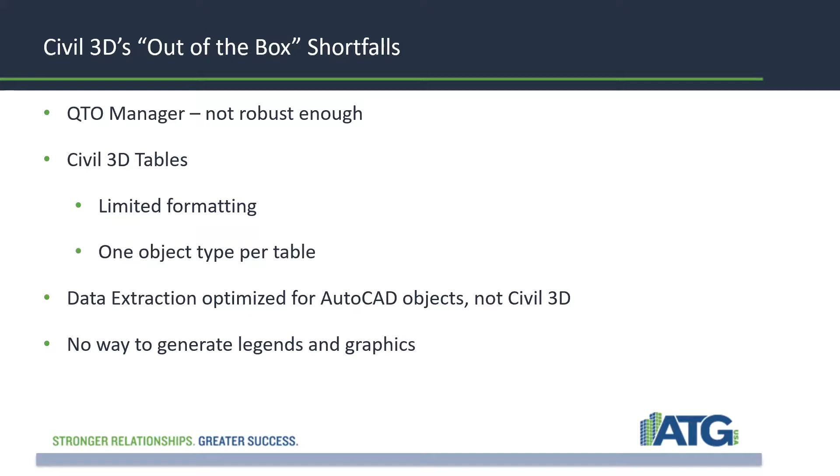There's also no way inside of native Civil 3D to generate those legends or those graphics based off of all those symbols. You still have to insert that block or draw one of those lines in order for it to show up. So that's where Data Wizard comes in.

We want to use Data Wizard because our legends that come out of this include only the objects found by our filters. So when we say, I only want to see fire hydrants, I don't want to see anything from stormwater, it's not going to show you any stormwater. And every time you have more fire hydrants or different types of whatever it is you're looking for added, it's going to be able to pick up on that for you.

You can do this at the level as narrow as an individual viewport or a whole layout. You can do it in one file and all of the XREFs that are inside that file, or you can do your entire project, and you can create one table or multiple tables at any of these different levels. Data Wizard works with both AutoCAD and Civil 3D objects.

Data Wizard has templates. This is going to allow your users to quickly reuse templates that may have already been set up for them or that they've set up before. Or if they need to make a slight modification, they can do that for their specific task without having to start over from scratch every time. And the big one here is there's no more standard legend that people have to work off of that needs to be organized or verified by hand.

So with that being said, I could tell you about all these things that the tool does and where the buttons work, or we could just hop inside the software. I think we all know which one we would prefer.

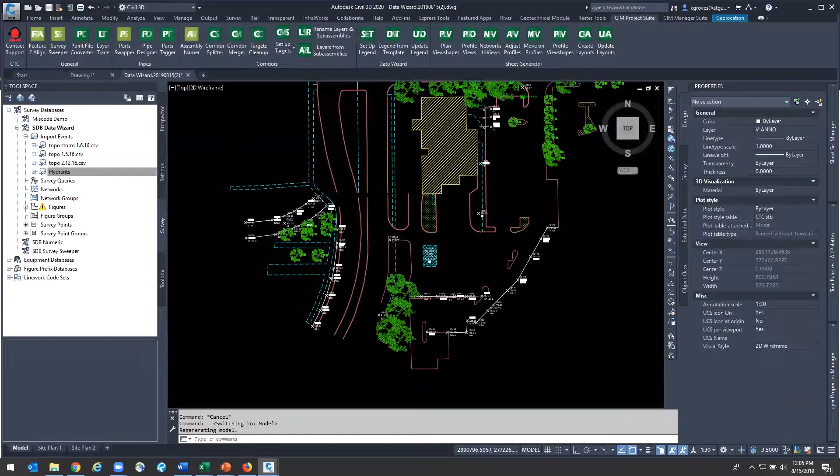So here we are inside Civil 3D. I've got my project. This was a survey specifically. We've got a client who has some property in this corner and over here on this lot.

So with that, I finally processed all of my line work. I've got all my codes looking right. Everything's all hatched up, and it's time to deliver this back off to the client and off to the civil engineer so that they can do their design.

What I'm going to do is come into the CIM Project Suite ribbon inside Civil 3D. I'm going to go find my Data Wizard panel, and I'm going to start setting my legend up. This is kind of the bread and butter here. If I had a template saved out, I could start from that. We'll go ahead and run through and create it.

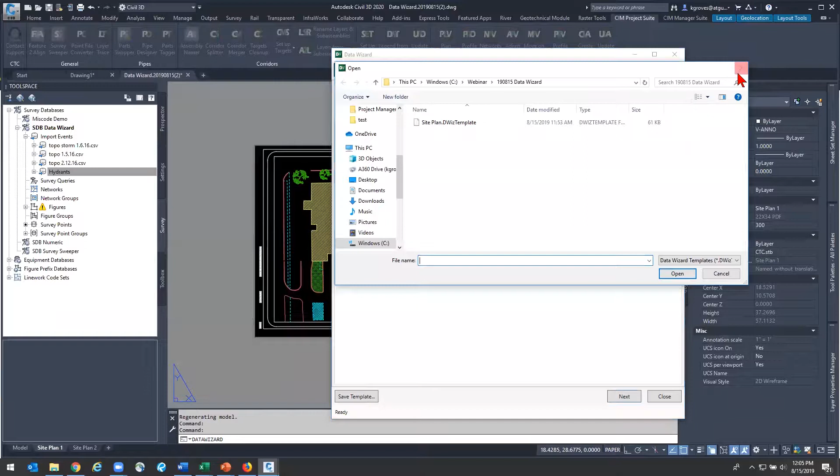But even through here in this drawing, we get to say, am I in one specific drawing? Is it the current drawing? And do I or don't I want to include the XREFs as part of that?

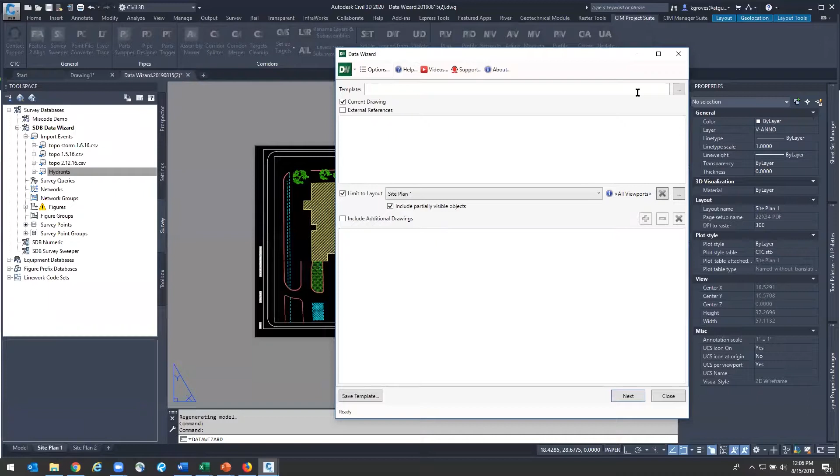For our layouts, I can limit it to a specific layout. In this case, I have Site Plan 1 and Site Plan 2. Right now, I'm interested in Site Plan 1. But not only just the layout of Site Plan 1, I don't want all the viewports. I just want this one specific one. So I'll remove the existing and then go link up to that.

If I wanted to do my entire project, this is where I could also say include additional drawings. Go find all of my different base files with my corridor and my pipe networks and my geometry, all my demo plans. Go ahead and bring me everything in.

And that's what this first page is. It's just about getting that high level information set up.

Next, the question is, what am I interested in? What types of objects do I want to pull out and use in my project in this read of my project? So I mentioned we've got AutoCAD and Civil 3D - that's 3D polys, regular polys, alignments, blocks, cogos, feature lines, survey points and survey figures, hatches, multi-leaders, parcel segments.

This tool is still earlier in its development cycle. There's a lot more that CTC wants to do with this, including getting pipe networks and corridors built into this. It's not there yet, but as I think we will all find at the end of my presentation today, that is not an excuse not to use Data Wizard. It still does a ton of work for us that we don't want to do all by ourselves.

So as I mentioned, this is a survey, so I'm going to be looking primarily at survey objects. But I don't know how many I've found, so that's why I need to hit the refresh button. And I can also see that my filter isn't set up because my filter matches my total on all three of these item types. So let's go ahead and see what it is we can do to cut back on that a little bit.

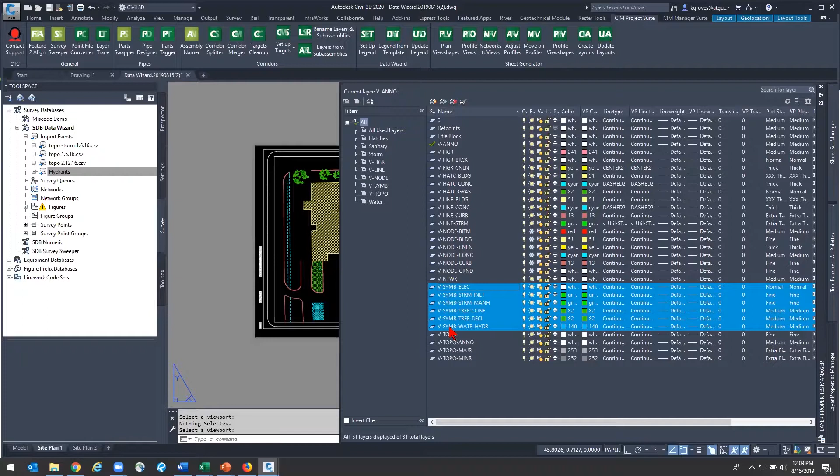So in this template, we've set it up in such a way that we've got our survey figures and our survey points split into two categories, plot and no plot. So all of our figures, all of our survey points that we want that are not going to plot, the description key set assigns them to a layer that has this node tag inside of it. All of the symbols or all of the survey points that we do want to plot have a layer with this SYMB or symbol plot associated with it.

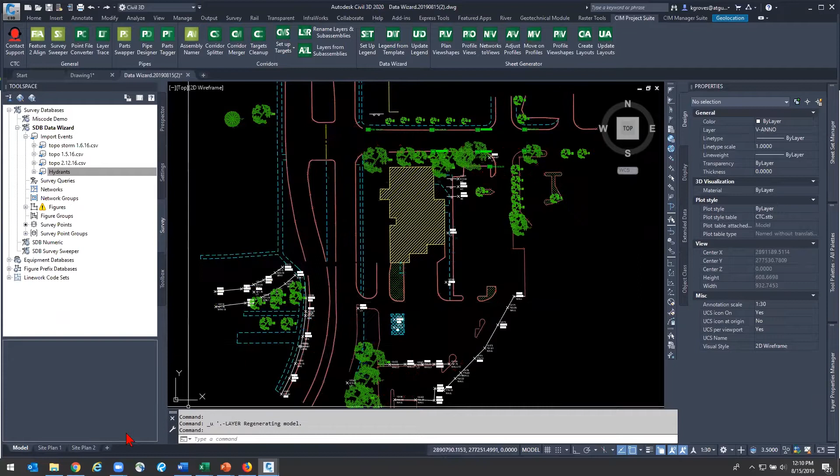If I pop into model space real quick and thaw out some of those layers, those node layers, we can see that's all the basic X stuff. Hey, I got a ground shot. Hey, I got a bituminous shot. Not generating line work, and there's no fancy block associated with it. But by setting our template up this way, it's going to make it really easy for me to use Data Wizard to find those objects.

So I'm going to go back into my legend. It remembers where I was at.

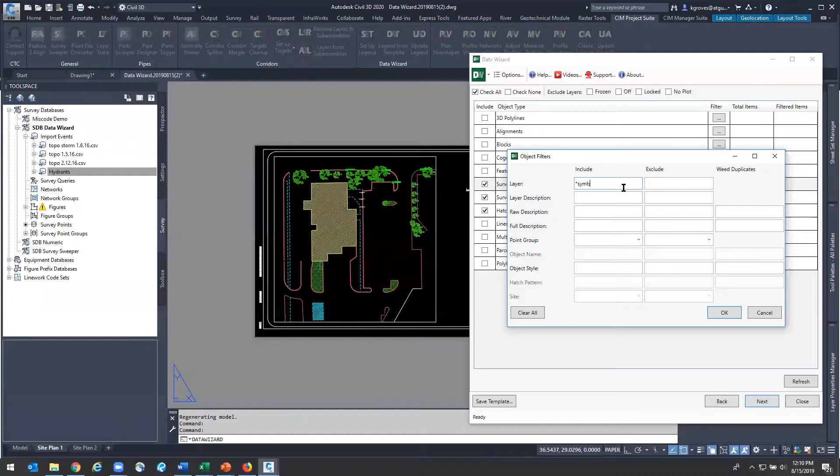I'm going to go in and I'm going to find my survey points, and I'm going to filter those to include the layer SYMB tag. Now it's filtered that down so that there are only 25 survey points that have fallen on any layer with that criteria.

For my survey figures, FIGR, that is the no plot layer, LINE is the plot layer, so I'm also going to include that, although not much is getting moved out from that. Hatches, not even going to bother because they're all there and they're what I'm looking for.

So also notice too that we have the opportunity on this "what are we looking for" page of the dialog where you get to say, am I interested in objects that are on frozen layers or no plot layers? Off or locked? Well, in this case, I'm doing my printing legend, so I would not be interested in objects that are frozen. I would not be interested in objects that aren't supposed to plot. That's not going to affect me right now, but I just want to point out some more of the flexibility that this tool allows.

So page 2 says, all right, we found 25 items, but what are those 25 items by the time we get to the third page? Well, I've got some trees, some signs, and a catch basin. But these trees are being duplicated. There is a way to fix that, and I'll show us how after a little bit. I want to get this table in first though. But we can also see our survey figures and our hatches. Buildings, concrete, curb, grass, all looks pretty great.

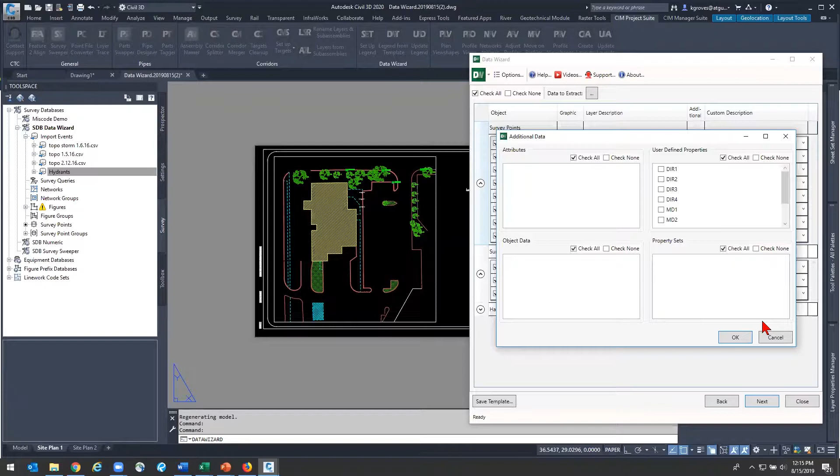Property sets, kind of the +1 to attributes, that can be assigned to most any AutoCAD or Civil 3D object. For example, this is a really common way to talk to Navisworks. So if you wanted to categorize your information that way, you could add a property set to it, and that's visible to most Autodesk products. So this additional data helps us find more about what exactly it is we're looking to pull out of these objects.

So I'm going to remove the additional data out of this table, but I'll leave that custom description in. And now we can move on. We've said, where am I looking? What am I looking for?

Specifically with those objects, what is the data that I'm interested in for those objects in general? And now in this last page, we get to say, how is this all going to get put together and how is this all going to get spit out? Well, we can rearrange the order of these things by clicking and dragging around them. I can bring my hatches up front, or maybe I want my points first,

whatever. So you can do that kind of manually down here, or you can run up to this data sorting button and you can sort your object groups. So you can sort those alphabetically or not. Within each different type, you can choose to sort its data differently. So you can sort it by the object or any of that stuff that we pulled out. So I'm going to sort these by custom description. We'll say OK.

Capitalization, pretty straightforward. Which letters do we want capitalized where? And then for the graphics, cell size. So now we're getting into how big we want all these tables, all these cells to be. And with that, we have the opportunity to say, all right, well, big cells, little cells, some as big as your head. The graphic scale factors, I'm going to leave this at 1.33 right now, but this is how we talk to the source data for this particular object.

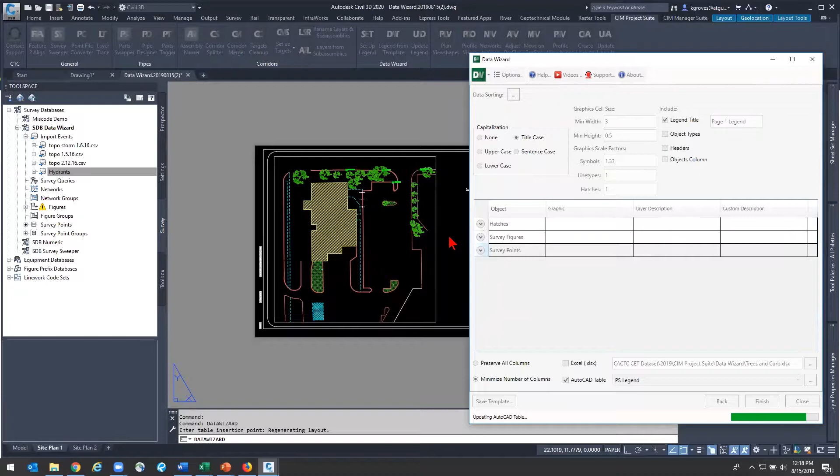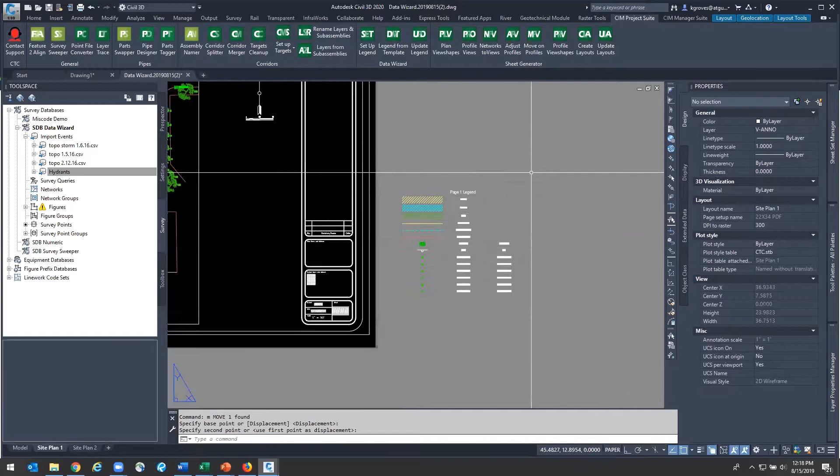And I can see that a lot of that stuff that I specified was in there. I put my hatches on top. It got sorted with my hatches on top. I wanted to include my custom description. It included my custom description. And I can see the ways in which it was different than my primary. But this isn't exactly the legend I was looking for a couple of reasons. My trees are being reported with not a whole lot of extra information, but for some reason I have extras.

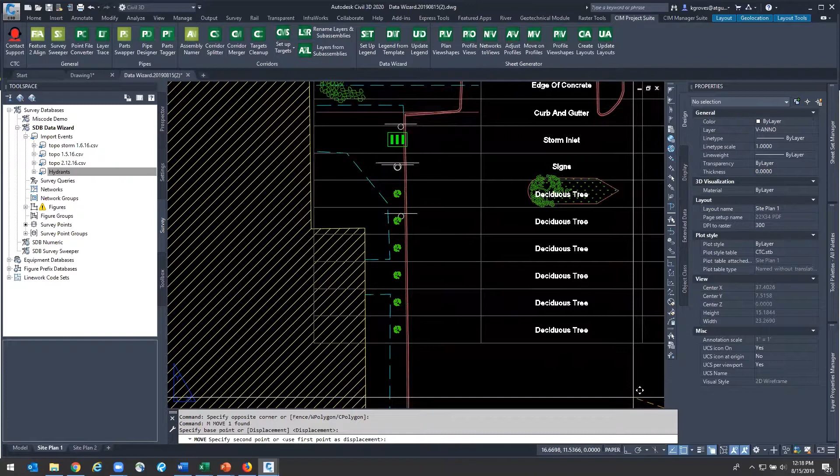And if I take this over to my model space and kind of hover over to check, I can see that my sign is a little bit bigger than what's being reported in plan view. And I can see that my catch basin is as well. Well, let's go back through and let's modify this table. The one thing that's going to be kind of different for users to understand is that with these tables, you're probably just better off deleting it than trying to go back through and update it, because the result's going to be the same anyway. And you have to set up your filters before you can apply them to your object.

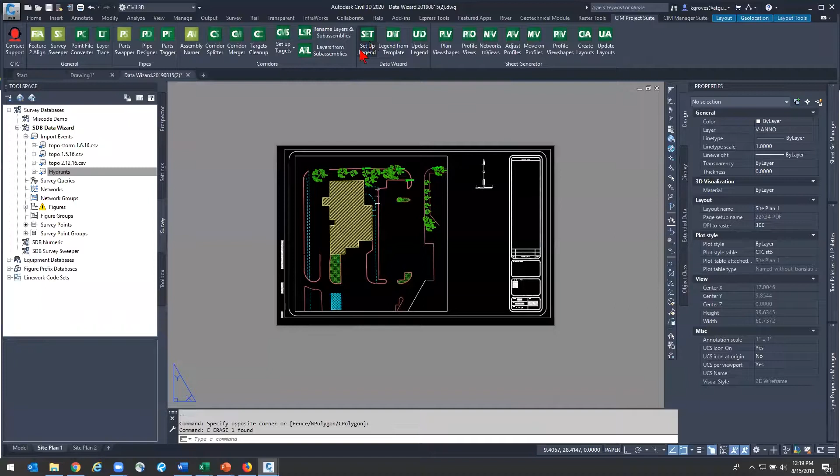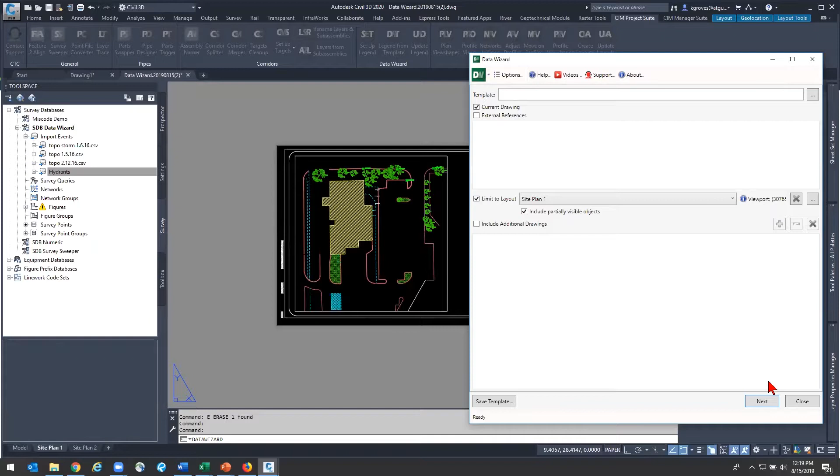So let's go back and set that legend up. Notice that everything is going to be remembered from when I was back in here last. That's because this tool, all the CTC tools, write some data to the program data user preferences folder. So that's how a lot of this is getting called back to. But I want to keep most of this stuff the same. I'm still interested in all of those different types of objects, except I don't want to grab every single survey point that meets the criteria of being on my symbol layer.

That's because I have multiple different trees with multiple different raw descriptions. That's why I'm getting those multi-reports. So this third column that I kind of skipped earlier for weeding duplicates, this is where I can come in and say, well, I don't want to duplicate my tree deciduous. I don't want to duplicate my catch basin, and I don't want to duplicate my sign. Standard code asterisk notation there.

Now when I run that, I've been filtered down to just 3 items, which are my trees, my sign, and my catch basin. At this point, I'm also going to pull that custom description column out because I've got this set up with my layer descriptions to report accurately.

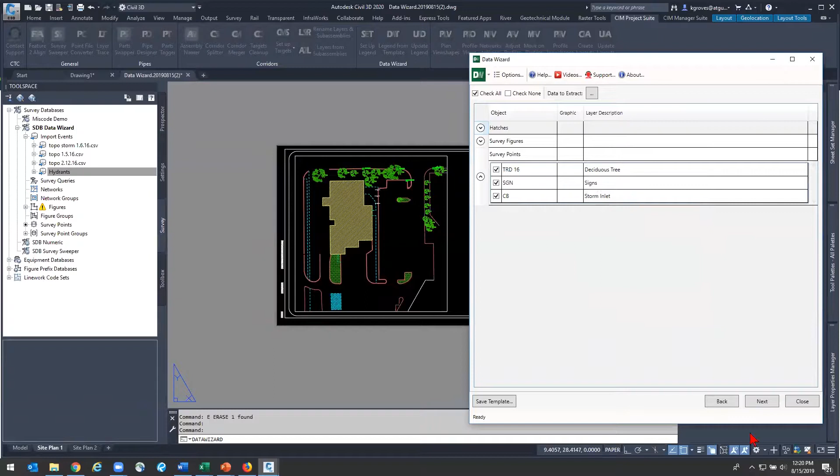And then I'm going to save this template for later use. Drop that table into my drawing. And now we can see that this is looking a lot cleaner.

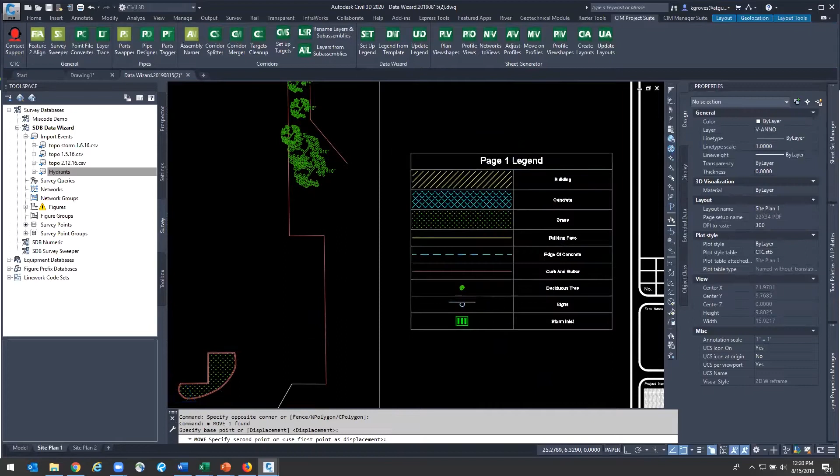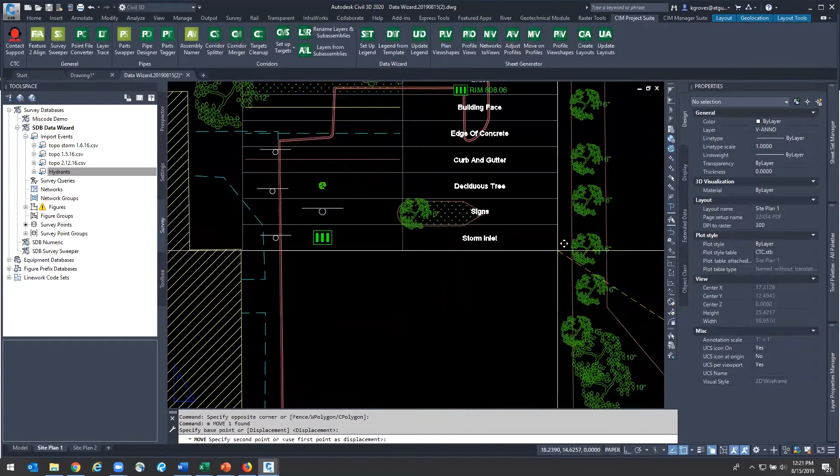And my signs, oh, shoot, sorry. I forgot to change the graphic scale on that last page. Scale factor for the symbols to 1.0. Graphic scale factor set to 1.0.

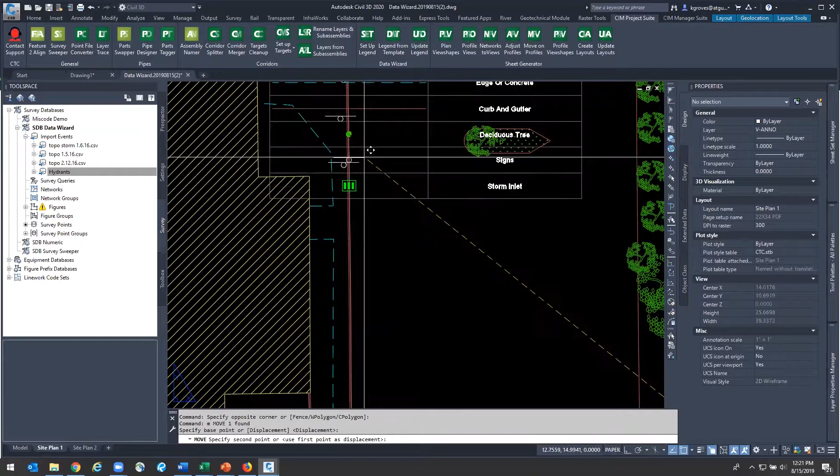And now my signs are the size of a sign, and my catch basins are the size of the catch basin. So this is reading off that viewport, and it's getting those scales to match what your viewport says. So I've taken you all through a lot of setup, and I really appreciate your patience and you sticking with me on this, because now we're at the time for the payoff.

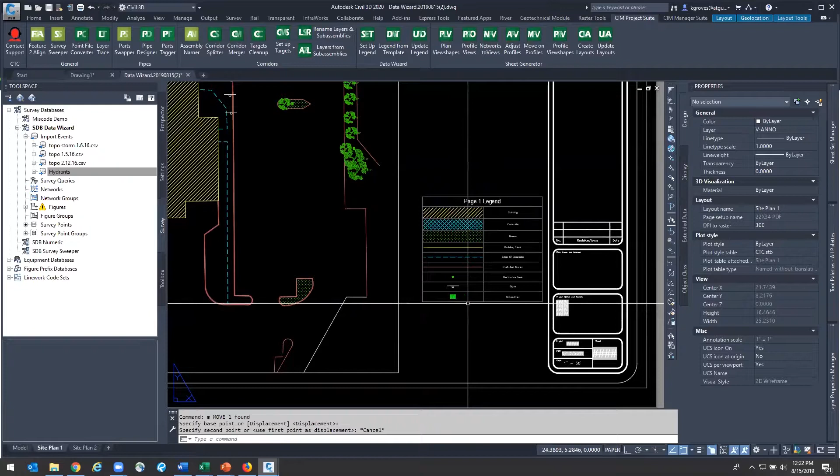So this is not just a dumb table. This is dynamic. This is going to read through the rest of my drawing. So when I make changes and I update this table, that table is going to read through all of those filtering criteria, all of those filtered objects, and it is going to be able to figure that out for us.

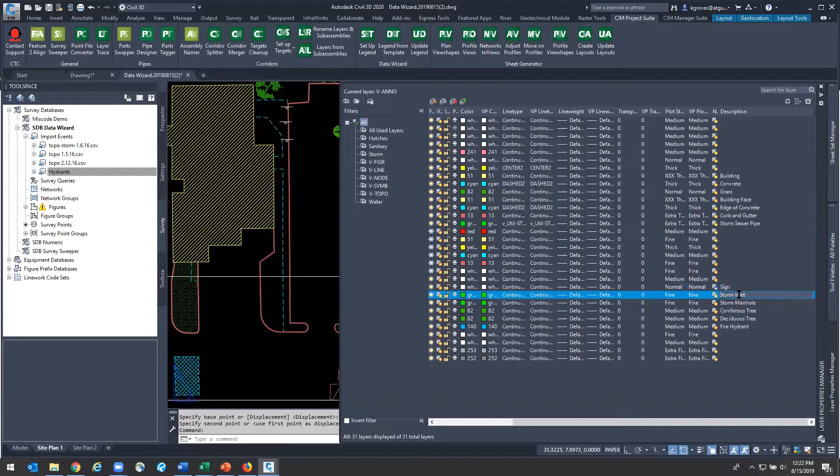So for example, when I change my layer description for signs to sign, when I change my storm inlet to just a regular inlet, it'll pick up on that. Also, oops, I forgot to include all of my data in my drawing. Let's go ahead and insert those fire hydrants that somehow got removed from my drawing previously. Let's go ahead and put those in here.

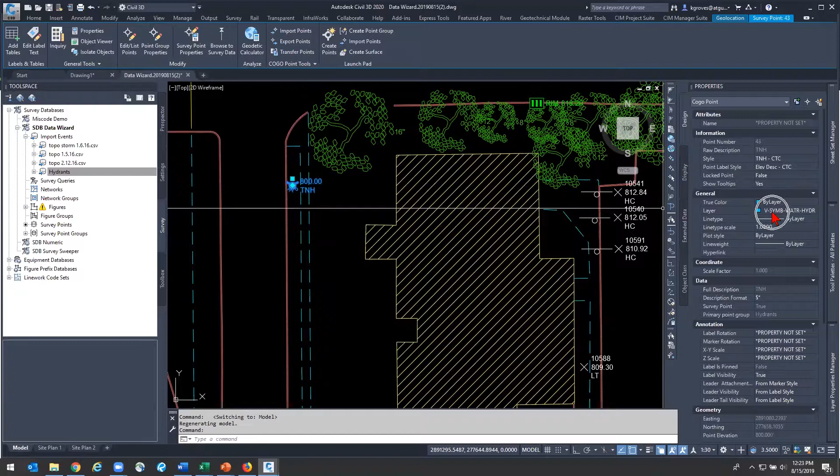And let's see how that works, because if I did this right, and I did, that description key puts those symbols on the symbol layer, and that's what Data Wizard is looking for. So now I can take this table. I don't have to go back through and set it up. I just need to update it. And it's going to read that table, and the template is using just that table. And now my project is updated.

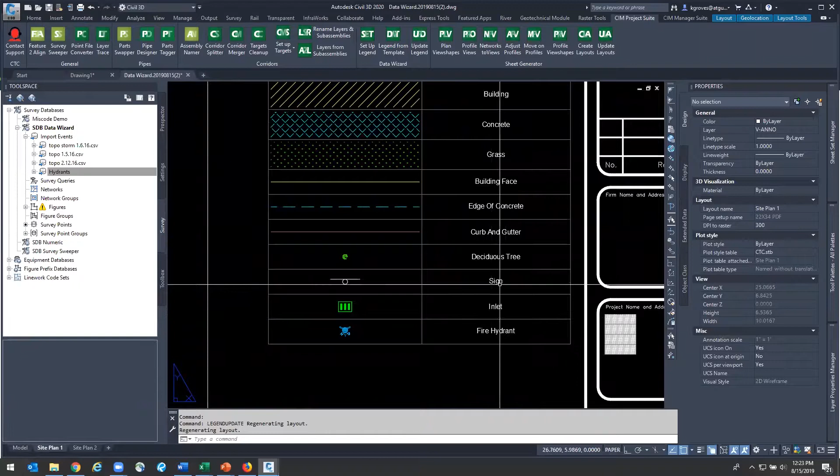So this used to say storm inlet, this signs used to have an S, and now I've got my fire hydrant in here. So no more static legend. I set up my filtering criteria. I tell my table what objects it's supposed to be reading off of, and it works. Really quickly, let's see how this template can be applied to another drawing.

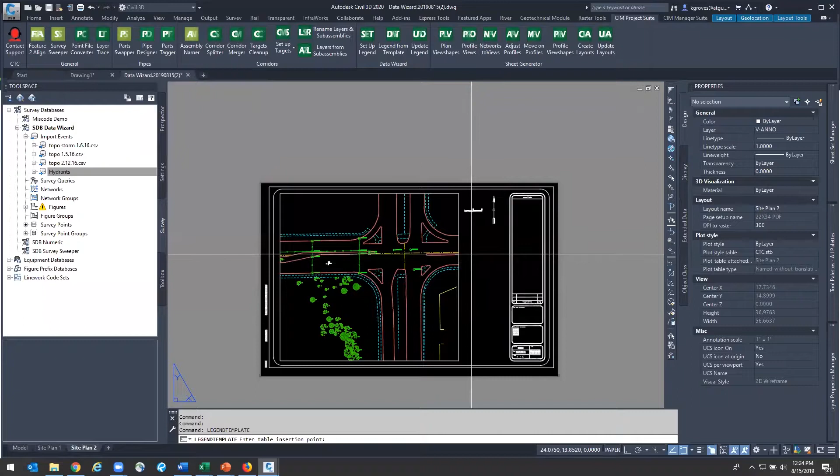So I'm going to run the legend from template. I'm going to choose that one that I just saved a few minutes ago, and I'm going to just insert that here on this table. Well, this isn't quite right because this legend is using a template that was referencing a different viewport altogether. So I'm going to set this up, load up that other one, and make a few quick tweaks so that this should work appropriately for all of my legends.

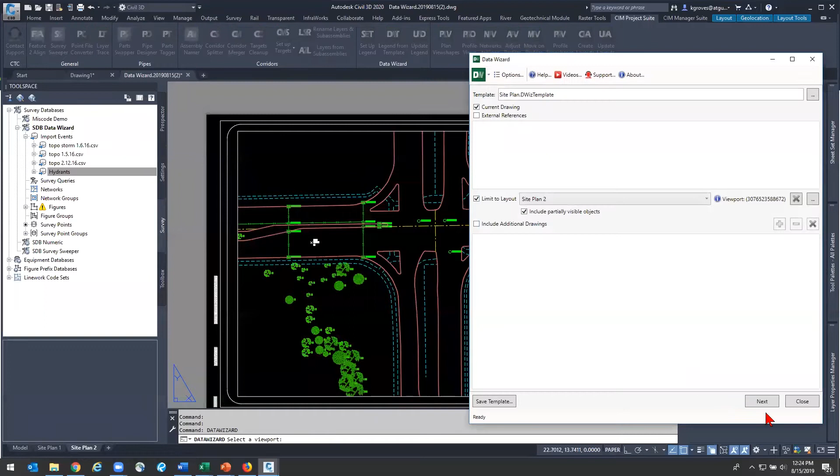And I'm just going to remove that layout here. I'll change it to site plan 2. I'll go find this layout. And I need to filter some additional stuff. Stormwater manhole. I used the wrong code for that. We've got SDM as well as TRC. No matter.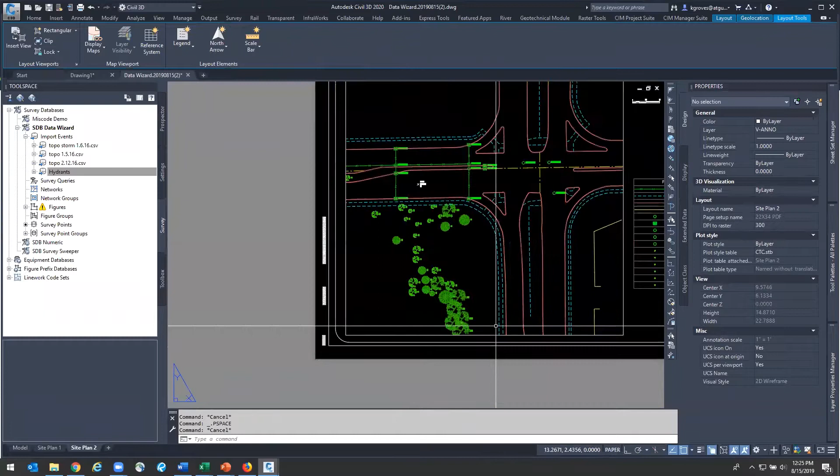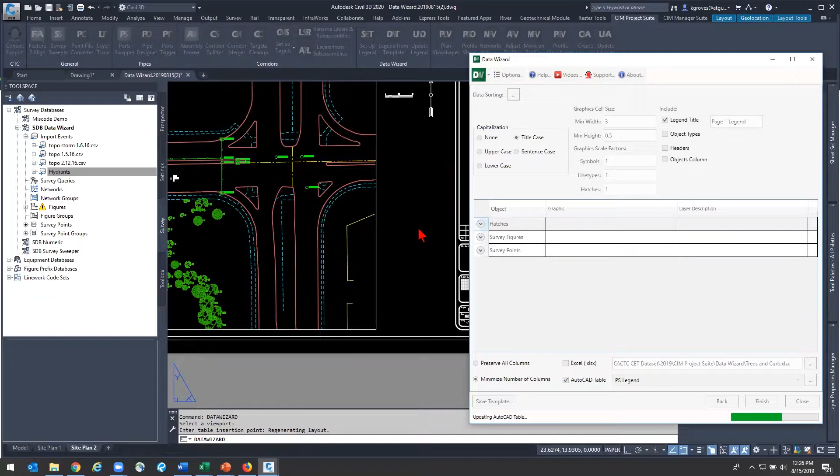We'll just load up that other template and make those quick changes. And it's just that easy. Understanding what it is that we're looking at, adding in some appropriate filters, modifying those filters, and letting the tool do its job. I forgot what that one was, but I know the TRC. By weeding out the TRC, we should only see one of those instances inside the table. And if my memory was any better, we would have filtered that out and it would have worked.

So that is, in a nutshell, folks, how we can set up Data Wizard to create our legends for us. And in summary, what did we learn today? We learned that Data Wizard allows us to have accurate, project-specific legends and takeoffs. I know we didn't talk about the takeoffs too much today, but that is going to be the subject of a future webinar. But with this tool, we get to remove the human error.

Only objects found by the filters that we set up get included in the legend that we're creating. We can set up templates so that our users can use these things for instant results or to make the minor tweaks that may not have been included in the thought process of creating that template in the first place.

And Data Wizard can be configured for your organization standards. There are certain things that are going to shake out that CTC and ATG are going to recommend for ways that you set up your environments, but this tool is flexible, and there have been some areas like the custom description in object to filter or data to extract that are going to make this tool more flexible for everybody right away out of the box, or for projects that maybe you didn't have quite that hand in setting up the way you wanted it to.

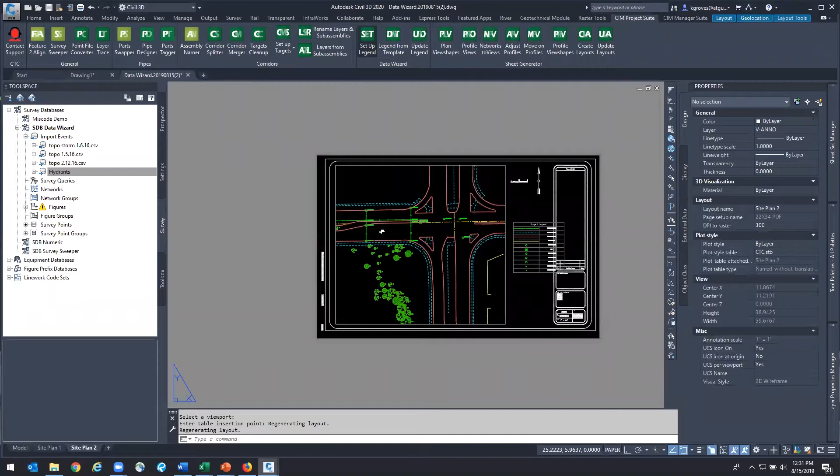And actually, Barb Piper is on the line joining in with the webinar today. And I want to give a shout out to Barb specifically because she works for a company called Bolton and Menk. And Bolton and Menk, this tool, Data Wizard, was a partnership with Bolton and Menk. And Ms. Piper had a lot to do with that.

And what I wanted to share that for is because the CTC Express tools are tools that are sourced from the user base. So if you have an idea about a tool that doesn't exist, a problem that you have that you want to see CTC do something about, or if you have a feature request or maybe even a bug report for tools that are currently out, click on that support button inside the software when you're running the tool. It'll take you to their page, and if you are in the US, that email is going to come through to ATG. We'll make sure that that gets entered into CTC's case system so that they can take a look at that and get the feedback that they need to make these tools work great.

And Barb was just saying in the chat window, working with CTC was really great in getting this tool put together. And I mentioned before, there are other things that we want to add to this tool that CTC plans on incorporating, like pipe networks, like corridors. It's in progress, but we're not going to get there, and these tools aren't going to work great for the user base unless people are submitting their feedback.

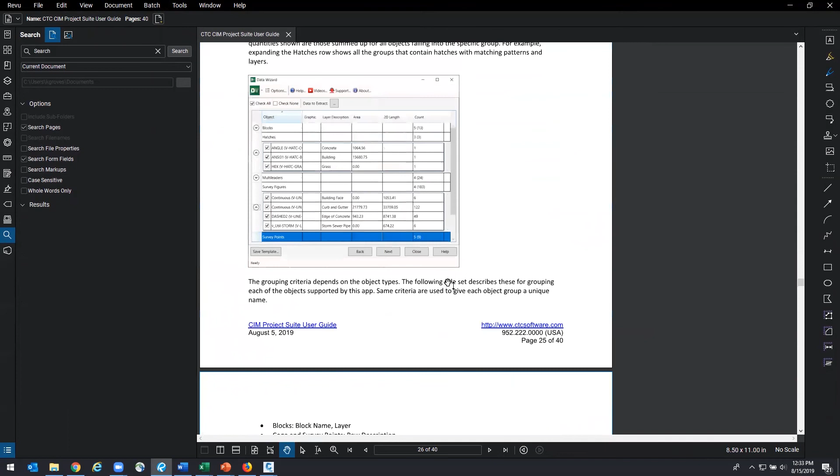The other thing through this dialogue in any of the tools, if you click on that help button, it is going to launch a PDF that is the user guide, and Data Wizard is like 4 or 5 pages of just, here's the button, here's what it does, here's how you can go through and manage that stuff.